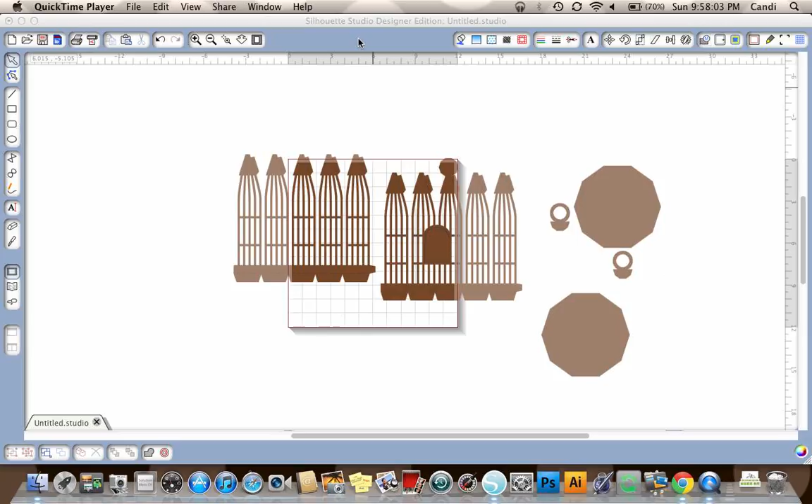chaosandcrafts.blogspot.com, and I promised to make a quick video showing how I modified the birdcage file from svgcuts to make it two separate pieces. I opened the file up in Silhouette Studio Designer Edition, and I ungrouped the base because we'll need that separate in a minute.

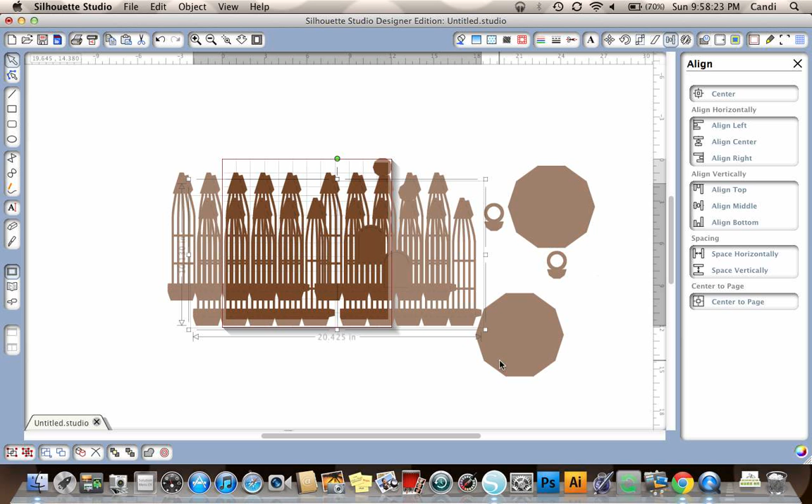First thing I did was select the top two main parts of the cage, then I went to Align and Align Bottom because you want them lined up perfectly for the next step. I then made a copy of them, because it saves you a few minutes later to have that. Let's drag those out of the way.

We'll have to realign those in a minute. Let's zoom in a little bit for the next step. What you want to do is cut off the bottom, because you're going to use this bottom portion down here to make almost like a lid or a box top for the bottom base part, which is how you get the two separate pieces. Select your knife tool, go over to how it is treated, and make sure it's selected as solid.

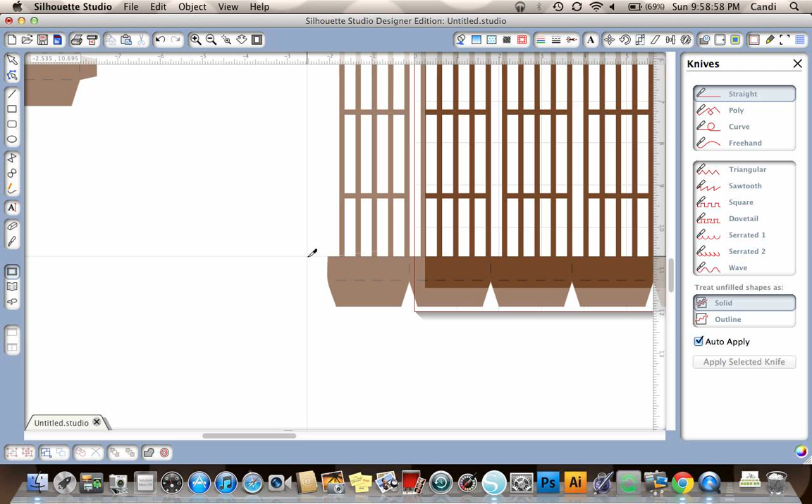I'm lining it up about the best I can here. It doesn't have to be perfect. Lining it up there, holding down the shift key as I drag over so that it makes a nice straight line across the entire object. Click again, and it is now separated.

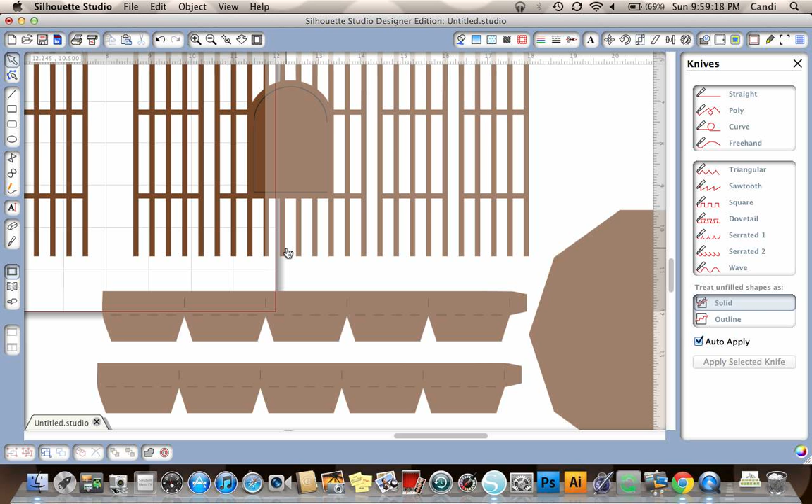Those are the two pieces that you're going to cut out along with the base in a few minutes. That will make your separate portion for the bottom. Now I'm going to zoom back out so you can see what I'm doing here.

We can go ahead and get rid of those top two pieces. We actually don't need those two at all anymore. They're gone. Let's go back over and get our other ones, and we will have to realign those real quick, as soon as I can grab them both.

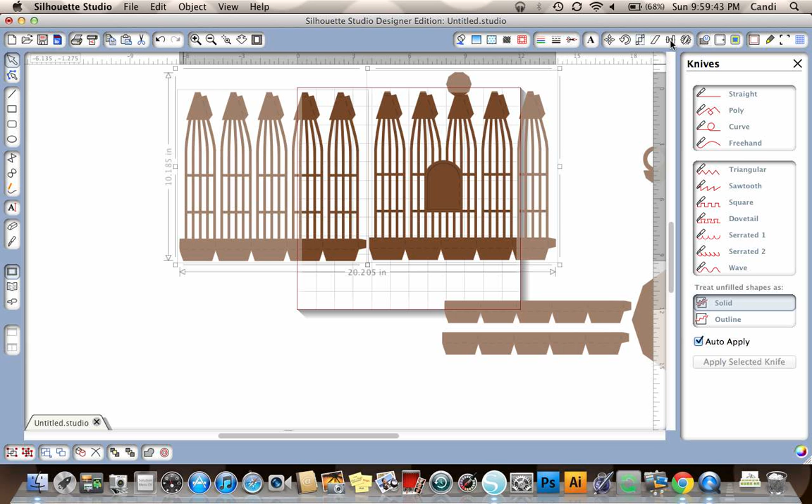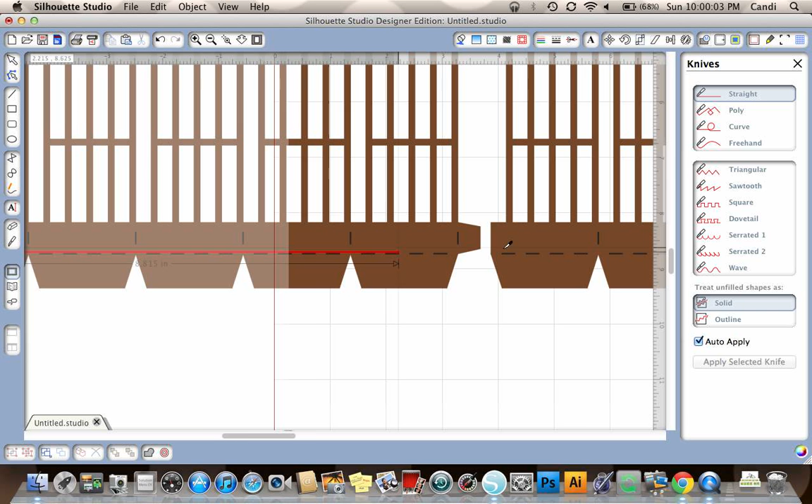Now you're going to do the same thing, selecting the knife. Go ahead and zoom back in so you can see what you're doing. This time we want to keep the top portion, but just cut off this bottom portion right here. I want to make sure I don't have any of the perforation, so I'm going to go directly above it. Then same as the last time, just drag it on over while holding down shift so you have a nice straight line.

Let go, and that is now separate. We can actually delete that part and delete that one. I'll zoom back out. And now you have all the pieces you need.

I found that the first one, if I didn't do any resizing of these bottom portions, I had a tiny bit of buckling. So what I did was select them, and I'm going to be honest with you here, all I did was just drag it a tiny bit bigger. If you want to actually measure and figure it out, that's probably a better way of doing it, but I figured out that just making it a tiny bit bigger really was all that you needed in order to fit the cage in properly.